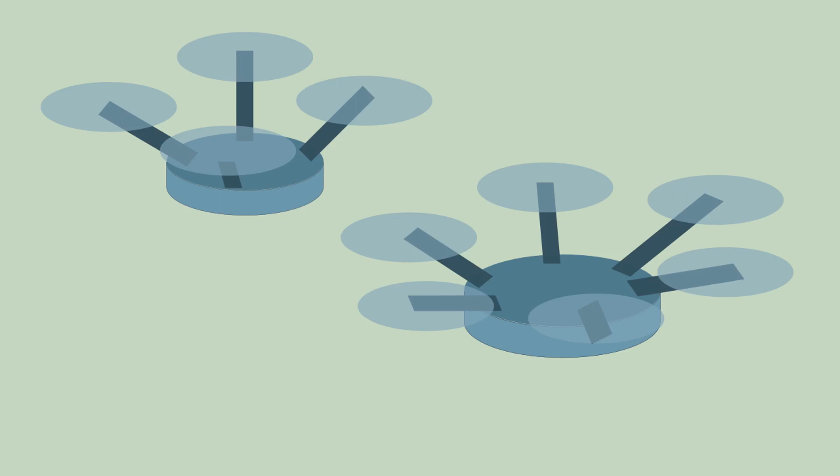To mount a machine gun on a UAV, unmanned aerial vehicle, one of the biggest problems is the recoil of the machine gun. Traditional recoilless rifles have venturis near the breech of the gun. Venturis are essentially rocket motors. The casing that holds the propellant charge has blowout plugs.

When the gun is fired, the propellant is ignited, the blowout plugs blow out, and the gases, a significant amount of the propellant, go out through the venturis, the rocket motors, and the thrust from those rocket motors balances the force necessary to accelerate the shell down the barrel. And that produces a gun of minimal recoil, if not zero recoil.

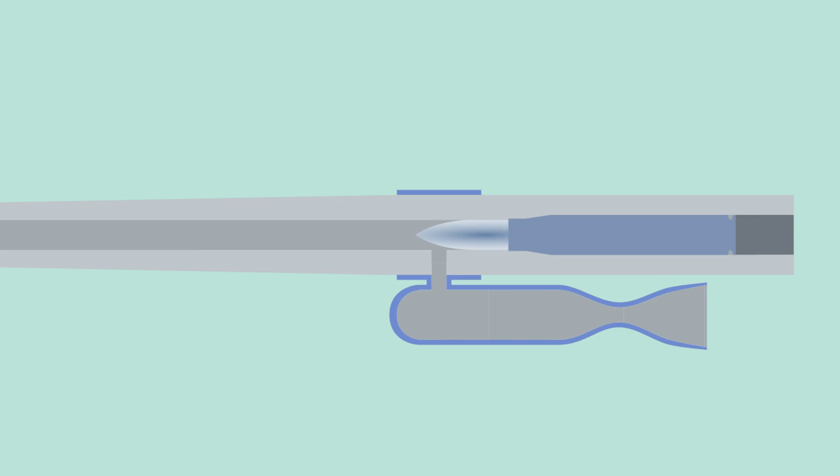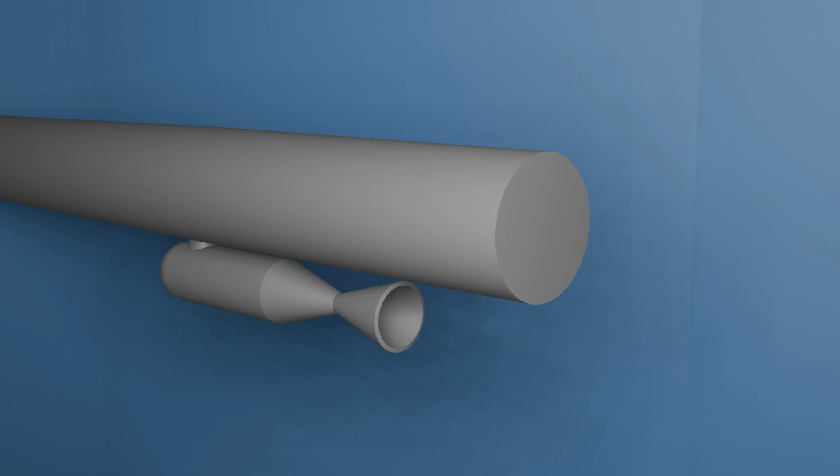There is another design of recoilless rifle. That is one that has a port in the barrel ahead of the position of the shell. When the shell moves down the barrel, propellant gases travel down through the port into a cylinder. At the back of the cylinder is again a venturi, a rocket motor. And that again produces a thrust that balances the acceleration of the shell down the barrel.

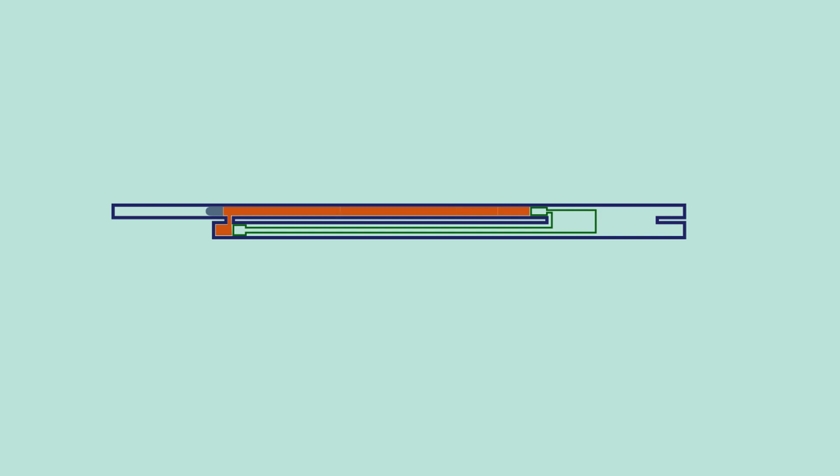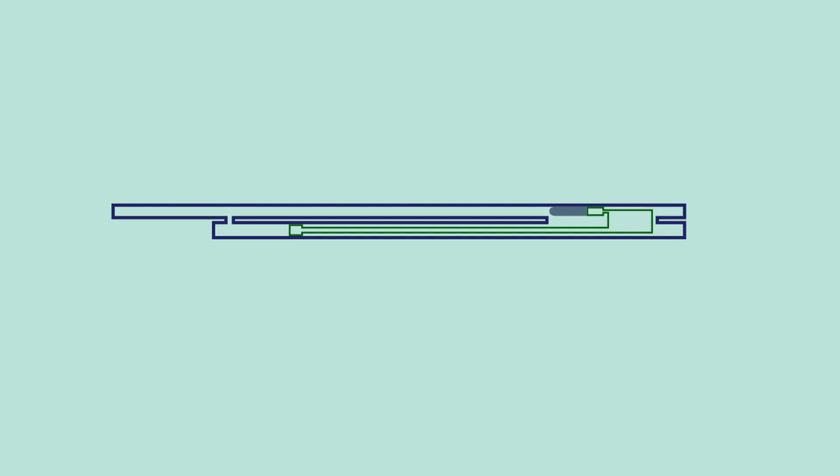The most common design of machine gun has a tube underneath the barrel with, again, a port in the barrel. Inside the tube, there is a rod. It is the operating rod. When the bullet passes the port, the exhaust gases enter the tube, push back on the rod, which opens the breech, ejects the cartridge, and then loads another bullet, another round of ammunition.

Typically, a recoilless rifle requires something on the order of 3 times the amount of propellant as a conventional round of ammunition. For a machine gun, that would mean a very large cartridge case. Extracting those cartridge cases is much more likely to result in a malfunction or a jam.

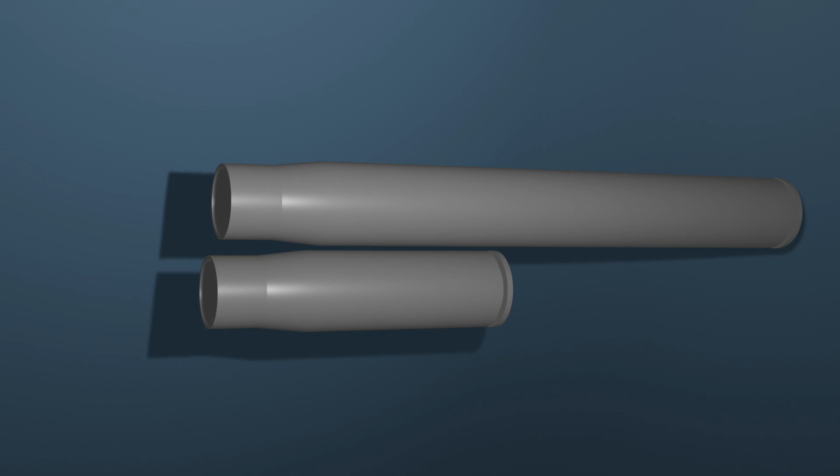Another option is to use a plastic case. So you might have a bronze cap at the end, which seals the barrel, and then in front of it you have plastic containing the propellant. Ideally, you want the plastic to turn into carbon dioxide, to go through an entire combustion process. If you have molten plastic going down the barrel, it can deposit inside the barrel, and that can again cause malfunctions.

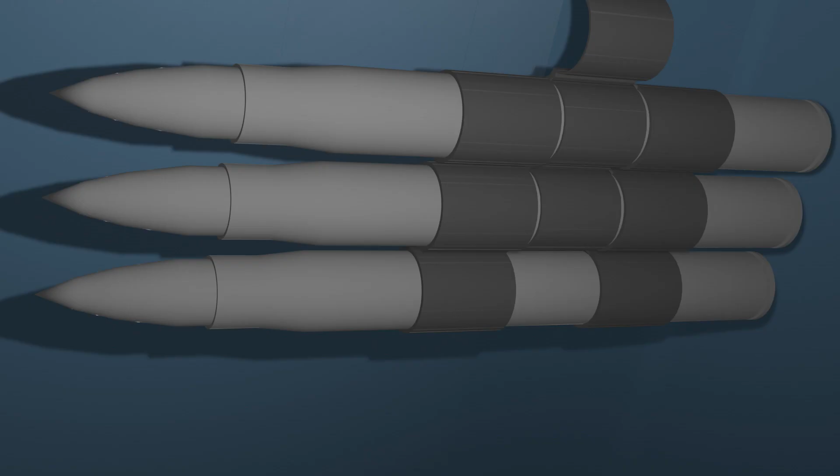In order to turn a conventional machine gun into a recoilless weapon, it is difficult to mount the venturi and the cylinder. Underneath the barrel, there is the operating tube and the operating rod that operates the whole mechanism. On top, you have a feed for the ammunition. You also need mounting brackets to hold it in place. There really isn't a good place to put a venturi.

There is an alternative design of machine gun developed by Heckler and Koch back in World War II. It's a German company. Their design is based upon the concept of Newton's balls. Newton's balls are the 5 balls hanging together. You swing one ball up, it hits, and the ball at the other end swings loose. The energy and the momentum is transferred through the ball at the end, and it's transferred back and forth.

The Heckler and Koch mechanism has a carrier, the front end of which has a breech seal. In back of that breech seal are 2 cylinders that move sideways and lock into the frame of the gun, holding everything in place. In back of the cylinders, there is a locking piece. When the gun is fired, momentum is transferred through the seal at the breech into the locking piece. And again, like Newton's balls, the locking piece moves back.

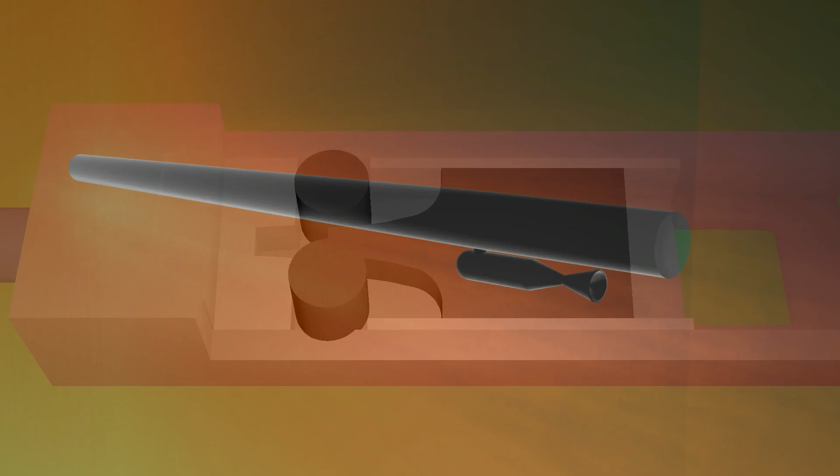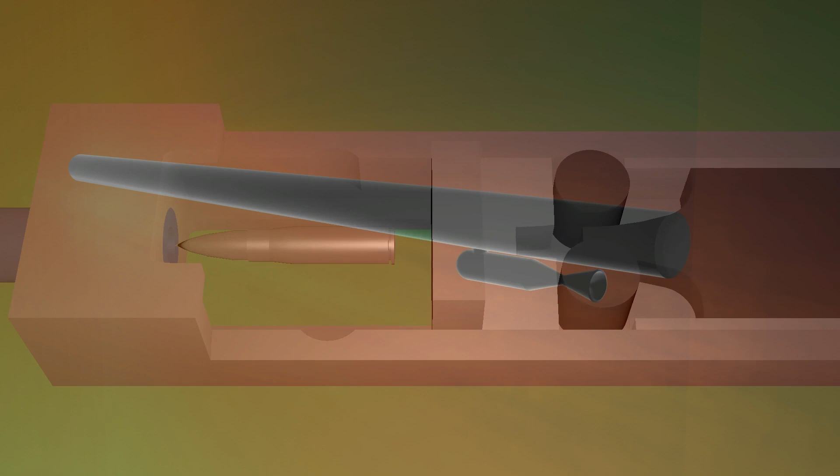When it does, the cylinders move in, and the entire carrier assembly with the breech seal moves back, ejects a cartridge, and then loads another round of ammunition. This provides a fairly convenient way if you want to have a recoilless mechanism. You can put the vent, the port in the barrel, and the cylinder with the venturi mounted underneath the gun because you don't have the operating rod. And again, this design can be mounted relatively easily on a UAV if that is what one wants to do.